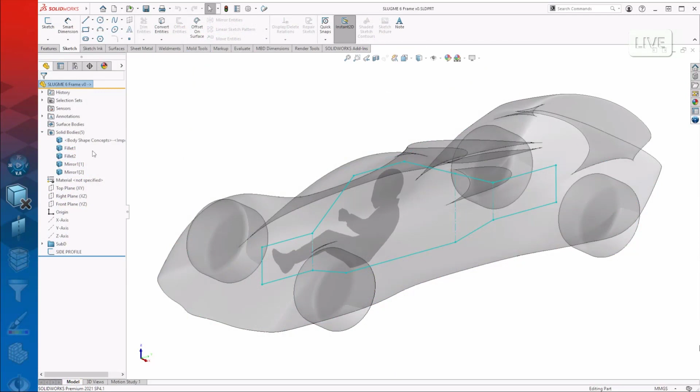All right, so the first thing that I want to do is just clean up this model. I'm going to get rid of the wheels really quick. This is a multi-body design. If you know me, you know my favorite thing is multi-body design. I'm going to start off with some really kind of lame tips first. How would I delete those wheels, Andy? Maybe select all 4 of these and hit delete? No, that's way too much work. You select on this and you delete it, and then you keep that and it deletes everything else, right? Good tip. Yeah, not bad.

Okay, so over on the left-hand side of the screen, you'll see that I've got kind of a timeline going here, because, like I said, I haven't clicked through this a lot, so it's my little visual of what I'm supposed to talk about and show next.

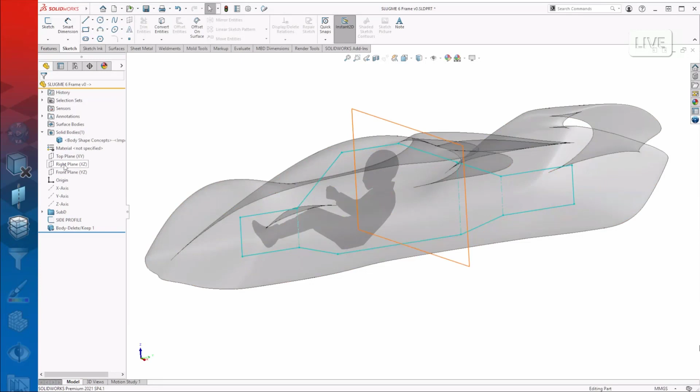Here's probably my lamest tip tonight. We're starting off slow and then it's going to get really good. I'm going to control-drag a plane to create a copy of it. I hope everyone has known that one—if you've ever attended any top tricks user group meeting before, you've seen it.

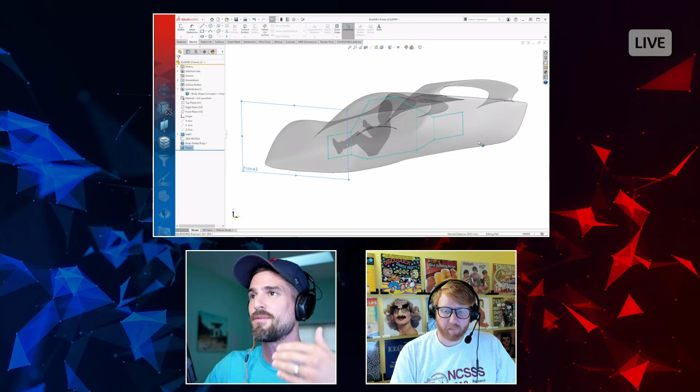The reason I'm creating this plane is because we're going to be creating a 3D sketch. Let's imagine we had a completed 3D sketch of the frame. How would we know if there was any interference between the 3D sketch and Jason's model, which is transparent right now? We really wouldn't, because the visibility of a sketch entity is the same whether it's covered by a transparent model or not. So it's not the most ideal situation.

A great workaround is a new tool they added a couple of years ago—the slice tool. Actually, it's called slicing, not slice. That's impressive that it found it in the command search. Quite surprised that it did.

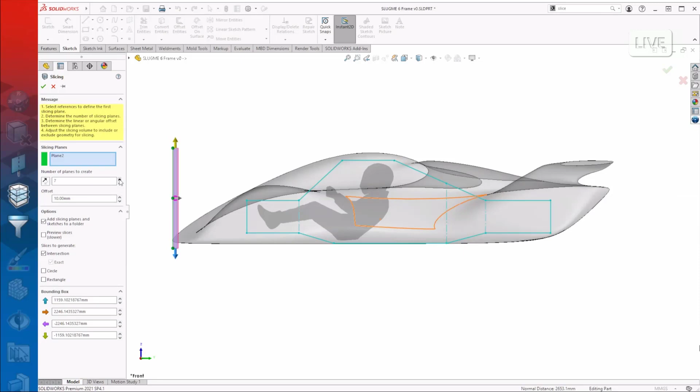If we take a look at this side profile, I've got 1, 2, 3—I'm looking at the connection points, the nodes where these members are matching up. 4, 5, 6, 7. So we're going to bump this up to 8, because the very first one is counted as well. Then we'll crank this up until it's aligned with the very last one. They're not perfectly aligned with where I need them to be, but this tool is pretty magical.

As soon as I hit OK, it's going to think for a second, but in a short amount of time—check this out—it added an intersection curve at every point where each of those planes crossed the geometry that was there. Any geometry that would be there, if I left the wheels there, it would be cutting a cross section through there too and updating that.

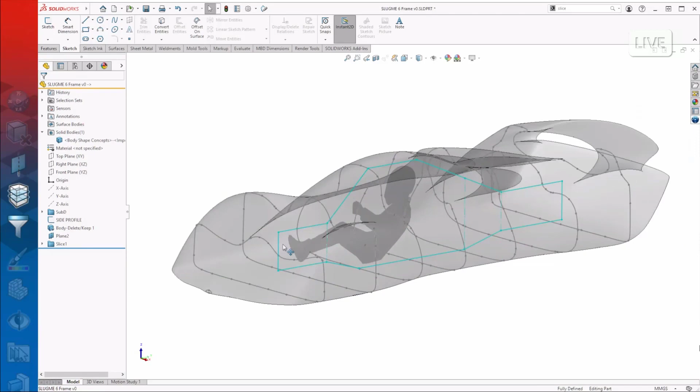One of the amazing things about this is, first off, let's make this a little easier to see. If I expand the new slice folder—which is also a nice part about the tool, it organizes it all for you—I can control-select this sketch and control-select that sketch and that one and go on and on. That's kind of slow, right?

We're trying to show you some shortcuts here. The best thing to do is in your filter bar at the top of your tree, just type in SKE. There's all your sketches. Now I can select this one and shift-select that one.

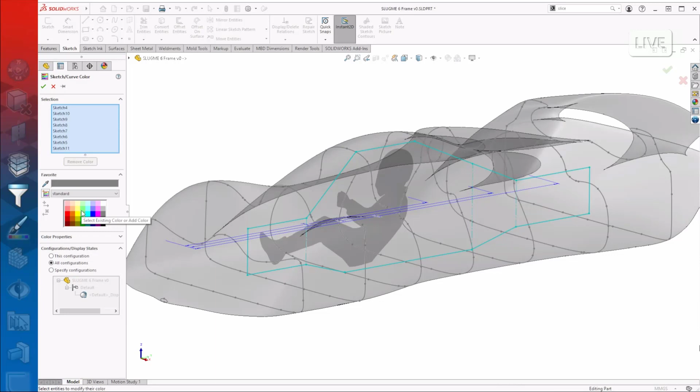Something I always do, especially when creating weldments and stuff, because you have sketch geometry going all over the place, is assign color to this. You want to differentiate your sketches, because if they're all this gray color, you're not going to know what is what, and it'll get confusing. So let's pick a pale cyan, since I picked a darker one for the side profile.

Now we can see very clearly what's happening here. Clearly the front of Jason's design is kind of like a little bat wing, and then it morphs into a frog, and then the frog gets tired and closes its eyes and then gets kind of evil and grows some horns. I don't know, it's the Batman. Yeah, I like that—that's better.

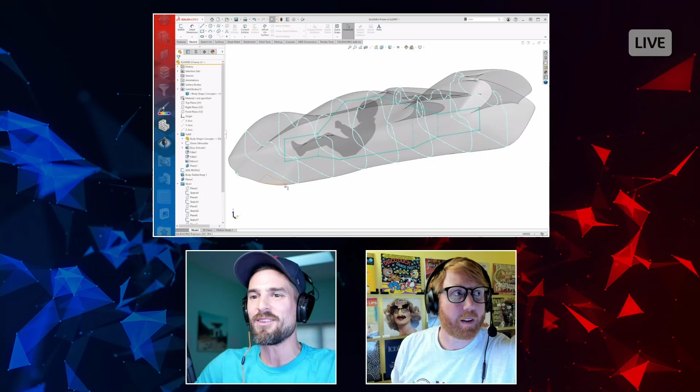So colors are useful, and this tool is pretty amazing. If we take a look at the planes—let's show the planes. Why aren't my planes being shown right now? Well, I got to turn them on. These planes aren't even shown anyway, so that's okay. Let's come over to this—let's skip the first one, let's go to this one.

Instant 3D is always active whenever you see those little blue dots—those mean you can drag them and move them around. And here's what's amazing: as I drag this, it's kind of jagged because it's rebuilding, thinking as it's going. But look at that.

Yeah, it's updating. It's staying associative with the geometry. And that's just, in my mind, pretty amazing.

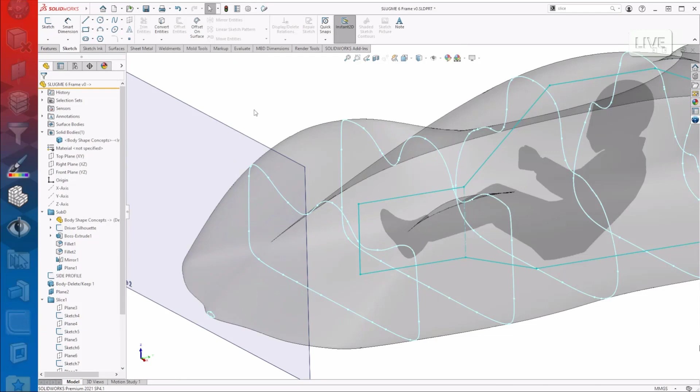Here's why it's especially amazing: if I go ahead and show the tangent edges - by the way, you got to have a keyboard shortcut for tangent edges, right? Especially if, like Andy and I, you're into surface modeling and stuff like that. Sometimes it's beneficial to know where they are, so you could select the edges really quickly. But I mean, what a mess this looks like.

But the cool thing about that is it was traversing across, going from face to face. And it was still maintaining its entities - these got created when we passed this little point right here. Before that, it was just one smooth entity and it separated. So amazing stuff going on with this.

This is the intersection - what is it? Intersection curve. Yeah, so it's just doing that over and over again.

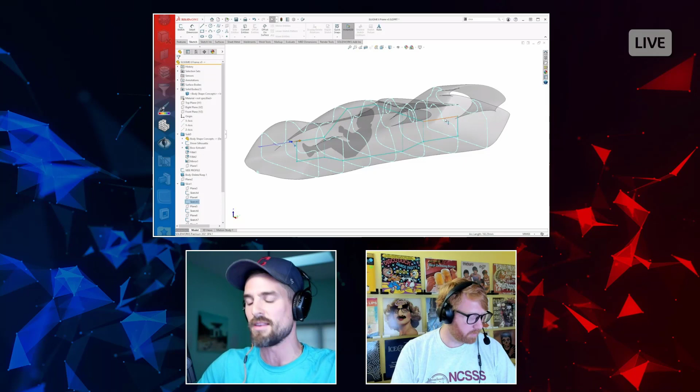By the way, if you're looking for a recommendation for keyboard shortcuts, what I do for most of my favorite keyboard shortcuts is just do Alt key plus whatever letter the tool begins with, because that's readily available. My thumb just naturally kind of sits on the Alt key, so it's really easy. Alt T for tangent edges and Alt G to make them gone - they're right next to each other, so it works out well.

All right, what if I wanted to hide all the tangent edges? No, before we do that, let's follow my list right here.

What is this icon right here, Andy? The little mesh looking thing - have you ever seen that? No. See it on the left, on my timeline? Features? Yeah, I was looking at that before. Like what? Yeah, I honestly don't know what that is. I'm not screwing with you right now. I was like, what's happening?

So I just want to show another use case for that slicing tool. What I've done is I've saved Jason's body out as an STL file. And if you know anything about STL files, they are a mess of triangulated faces. It's just crazy.

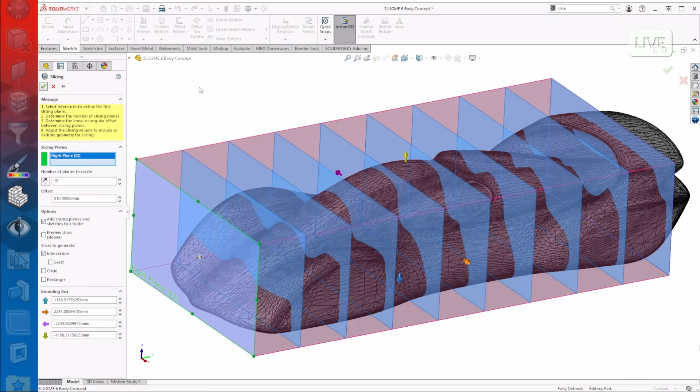What this does is it's going to take a little longer to think about it because it's doing more than it did even last time - it's doing a fit spline on every single one of those intersections. If I change the color of this really quick, we could see it with some evidence. I'll just make this a bright green. And look at that, Andy - it's perfectly smooth. Now we could just go ahead and create some loft features to blend these cross sections together.

So if you're downloading stuff off of like Thingiverse or something like that - I'm getting a little feedback, are you hearing that, Andy? I am hearing that, yeah. Okay, all right, I just want to make sure it wasn't my setup.

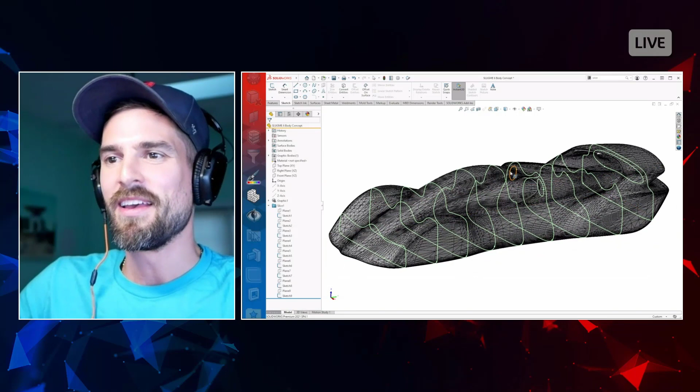But you'd be able to kind of take something from Thingiverse, which is all 3D printed files, STLs type stuff, and actually turn it into real geometry, which I think is amazing. Yeah, definitely. Okay, so let's get back here.

Again, I'm just going sporadically all over the place. I kind of feel like Jason. Like what? Wait, so what was that weird icon?

That was our mesh body icon. So when you insert a mesh body, it is a unique body - it's not a solid body, it's a mesh body. All about mesh bodies, man. All right, man, I've never seen... I'm telling the audience, dude - before.

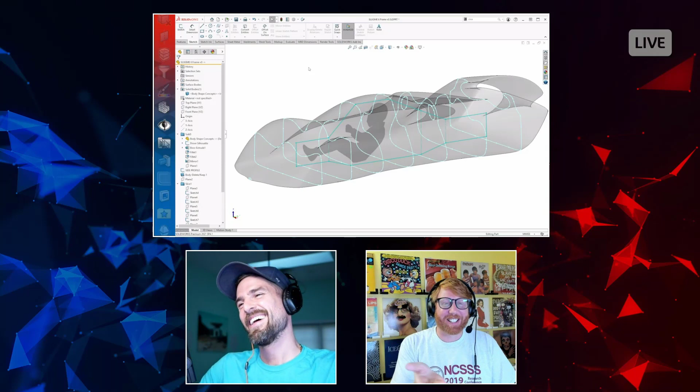Where is that feature icon? Show it to me. Did you make that? I searched through our icon library and that was there. It's a real feature. Are you talking about convert to mesh body? That's a different looking feature icon. Maybe it's a simulation one then. I picked the wrong icon. And maybe you're calling me out for it.

We're going to be over time because we're talking about an icon on my PowerPoint. I just don't want people looking for this voxel brick meshing icon when they're trying to play with their thing from Thingiverse. All right, settle down. The rest of the icons will be accurate, I promise. I got a little stressed with that one, I just picked the first one I saw. How are you not going to let that go though? That's the one thing I used a little liberty with, just be like, whatever. I love it, so good.

All right, so can't get anything by Andy. The next thing is going to be, how would I hide this? How would you hide all those sketches? Just the slice sketches, and keep the side profile.

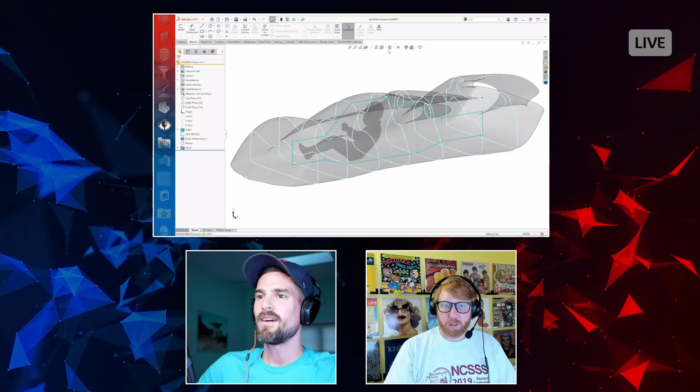Poke the eyeball. Oh, all right, just poke it. But then everything goes. Yeah, uh-oh. So what magic man, what do you got up your sleeve?

The first thing we could do is this trick again, SKE. But once we select this and shift select it, I never want to shift select or filter ever again. So what I'm going to do is right click in space and hit save selection. I do this all the time, especially for multi-bodies, because in multi-body design, especially when you get into weldments, there are cut list folders. Every solid body is separated into a little folder, and you can't just shift select them all. You've got to expand all the folders, control click, shift click, all kinds of stuff to get all the bodies you want.

And then the next time you need to select them, you have to do it all over again. So what you do here is select what you need, it could be sketches, edges, or vertices. You can use selection sets in all kinds of different ways. I'm just going to save this to a new selection. Now up here in my selection sets folder, I just click it, and I've got all those sketches selected in one click. I can rename this to whatever I want, so I'll call it slices. Now it's right at the top of my feature tree, very accessible.

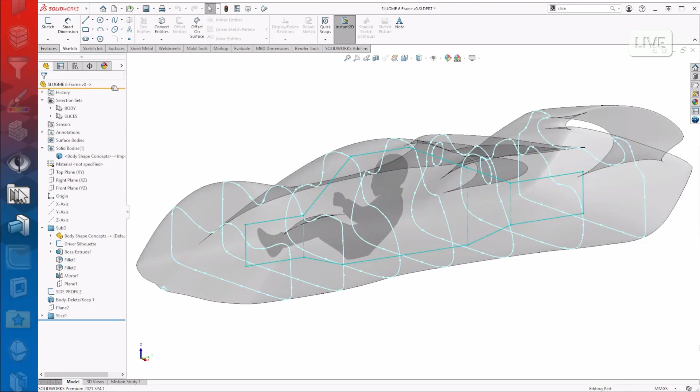I'm going to give you a pro tip here. If I want to hide everything, you'd think you'd right click on this and the hide button would be there, but that's not the case. I wish it was, maybe an enhancement next year. You've got to click on it once with a regular left click, then right click in clear space in the graphics area. Now the right click menu comes up that would if you actually right clicked on all those sketches, and you can go ahead and hide it.

So it's treating it like the feature. Right now, right click, show. Left click to select, right click to hide. And there's another benefit too. What if I just want to see those things momentarily? Just select it, we see the highlighted preview, then click off in space and it's gone. How cool is that? Very cool.

Selection sets are so handy. I can't tell you how many times I've had to individually select like 50 faces, and I make the one wrong click, like clicking in space instead of the thing I want, and then they're all gone.

You know though, that you can right click and do previous selection on the right click menu, which is very useful. Yeah, I found that out, but only if it's the very, very last selection. A lot of times what I've found, we need to make an adjustment for this scenario, like we need two selections back, because my accidental selection was selecting something else, a new piece of geometry, and it wasn't like clicking off in space.

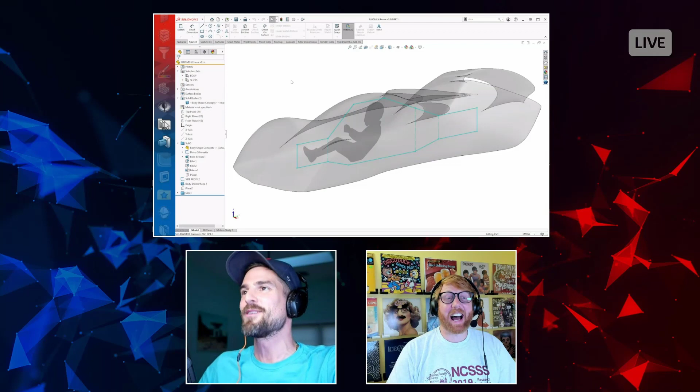And then it's like the previous selection is that thing now. Right. So yeah. Good point.

Anywho, let's move on. Let's actually make geometry now. How about that? Heck yeah. Yeah, I thought we were building a frame. What's going on? I know, right? This is me. I get off on a lot of tangents, man.

All right, so we're going to use this sketch right here, the side profile. Yeah, I didn't want to bore you creating that. We're just going to extrude it, so nothing special here. I hope everyone's using the right-click menu for selecting weird end conditions like the mid-plane, so you don't have to actually find the drop-down menu and do it all there.

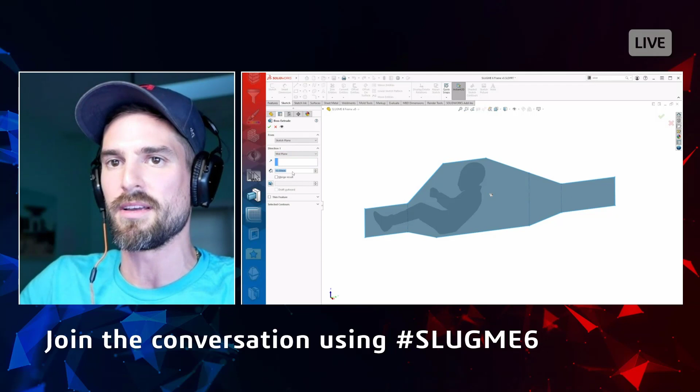And I don't know how wide this needs to be. Let's just make it about there because we're going to cut it away. We're not actually going to make it that wide, right? I think I can hide this sketch now. And I need to now address the top profile. So nothing fun here. Andy, if you want to tell us a story or spin the wheel of conversation topics, I'm just going to draw a pretty regular Joe Schmo sketch right here.

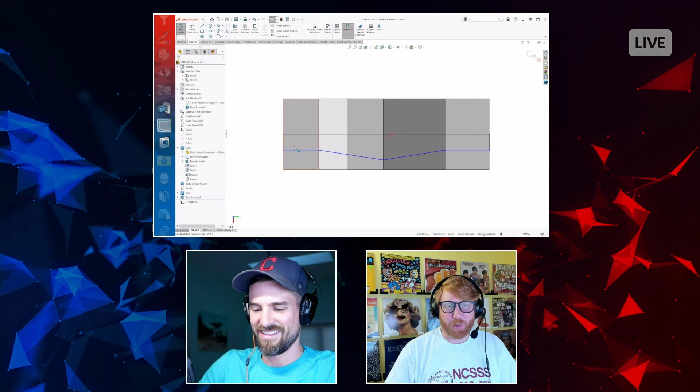I like it. Previously, on our last session, you were talking about how that kids ride shotgun thing is like a death trap. And then my kid asked me if we could go ride on it, and we went in the woods behind my house, which we've never done before because the trails back there are kind of sketch. And I just had that in my head the whole time. I'm like, we're going to go over the handlebars and I'm going to tell Jordan I can't come on the session because we're in the hospital because I'm a bad dad. But we had a blast and I got super sweaty and I had to take my second shower of the day. So there's my story. That's a great story.

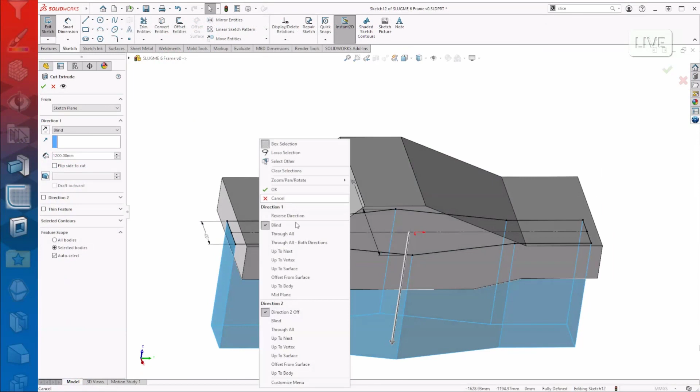And you timed it perfectly because I just added my last dimension. And Too Tall Toby would be very happy. I got rid of all the blue and made this sketch fully defined. Fully defined every time. All right, so we're going to extrude cut this thing. I hope this is not a trick or tip to anyone. Through both directions, and obviously you can flip the side to cut, right? Like I drew a closed contour. Let's cut everything outside of it, and there is my frame. The hard part's done, right?

So what defined this geometry? It was the 2 sketches. And what if I wanted to change the top profile? I would have to come searching through here and I'd be like, oh, sketch 12. Name your critical sketches, right? Definitely, so let's just call this top profile. Love it. And what about the side profile? If I want to change that, it's nested inside of this feature. It's kind of hard. Like, oh, I got to remember it's boss extrude 2 and da, da, da.

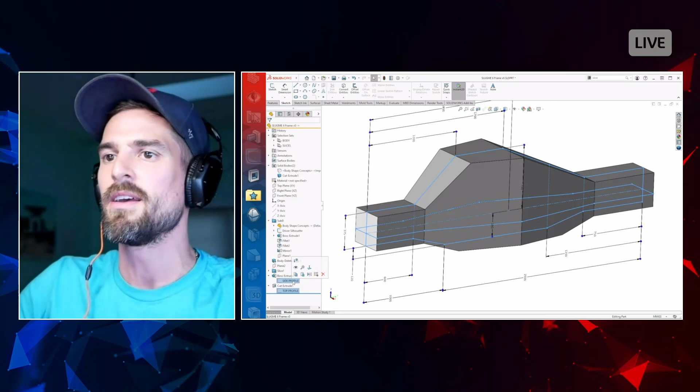Hey, what helps with that is obviously breadcrumbs. Right? Because you could go click on that feature and then, oh, it was made with the top profile. So that's cool. But imagine we didn't have breadcrumbs. And it's still a few more clicks than what I'm about to show you. You can select these 2 sketches and add them to your favorites.

Nice. So Andy, you and I know the master modeling technique. We use that all the time, right? Where everything's based on one master sketch. We always put that right at the top of our tree. Look, there's nothing above it. It's right there. It's super easy to find. And if I want to change its entire design, I go to one of these 2 sketches and modify them. Absolutely. Very basic. All right.

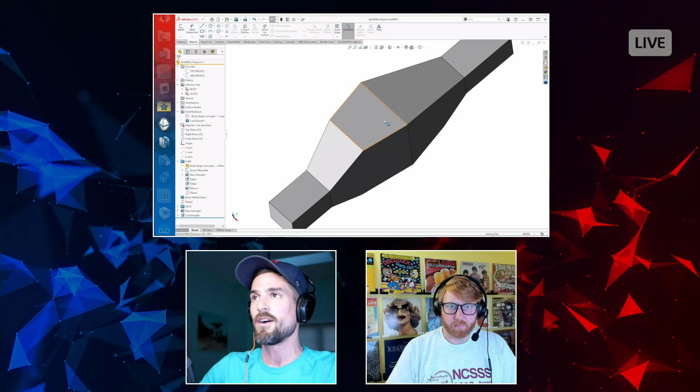So, yeah, I need to add a draft to this because remember, my job is to protect the driver and to make his or her ride as uncomfortable as possible. So he has way too much headspace right now. Yeah, get rid of that. I got to draft it in and cramp it in, so he can't even turn his head either way. It's just hitting the crossbars or the roll cage.

So what I'm going to do is start a sketch on the side plane. And what we want to do here is just split it. So I'm gonna fire up the line command. And how would you split this, Andy? I'd use the split tool. Trick question. It was that easy. It's a split command.

Were you thinking like, because some people don't necessarily know that you can do it with a 2D sketch? And you can create a plane or something? Or you might need to create a plane. You might need to create a surface that extends past the boundaries of the model. No, because a sketch resides on a 2D plane. That 2D plane defines a direction that the sketch would be projected. So that's enough information for us.

The next question asked in this property manager is, what bodies do we want to split? It's that one, the only one on the screen. And then we just need to use that tool to cut the bodies. Now it shows us that the resulting bodies is this. And this tool can be intimidating to some people because as soon as you fire it up, you're presented with part templates and assembly templates. It's going to propagate elsewhere. It's going to create more files. Yeah, you're like, what is going on?

Right. So what I do typically is I just cancel out of those template prompts, because if I'm just trying to split a body and keep it in this part file, that's all I need. The reason I didn't see it is because I have default templates set up. So if you do that, you can avoid it.

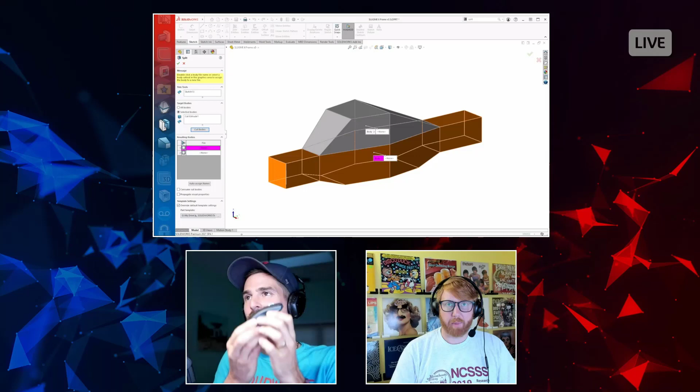But those templates are super powerful, because in the master modeling approach, when you're modeling something like this mouse, no one is going to model this top part and then this side part and then the bottom part all separately and then assemble them together. They're going to make this out of a single solid chunk of material, split it apart using a split tool, and then save each one of those split bodies into separate part files. Yeah. Then they could shell it out, add ribs, do whatever they need. We're not taking it that far. We're just splitting it. So that's why I said you could just ignore the part templates, ignore the assembly template.

And here's a little tip right here. Anything you check is going to be kept. So you could omit a bunch of bodies as well that you don't want to keep. But a quick way to select everything, sometimes you have like 50 resulting bodies, just click the scissors and it'll select everything in the column.

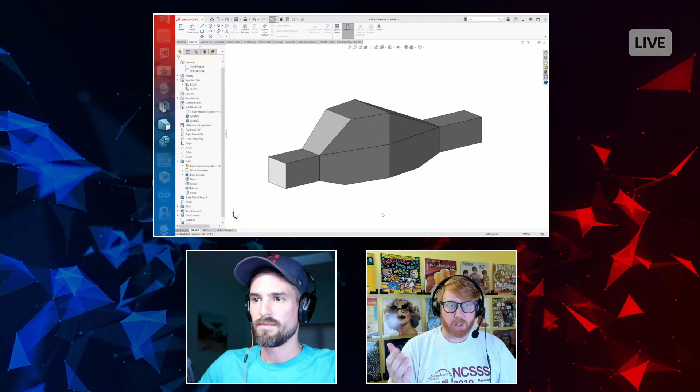Nice. What I was thinking about while you were talking about, oh, it's a line on a 2D sketch, so obviously it can be extruded out, extruding a surface. I was thinking about Marcus's session as well. Like sheet metal, weldments, well, I don't need to know surfacing stuff, right? I'm not creating organic geometry. But if you understand surface modeling, all of the other stuff makes much more sense, right? Weldments, sheet metal. If you want to figure out why your sheet metal part isn't flattening, if you know about surfacing, you're gonna be able to figure it out much easier. So take a surfacing class. It'll help you with everything SolidWorks related. Yeah. Everything is based on surfaces for sure.

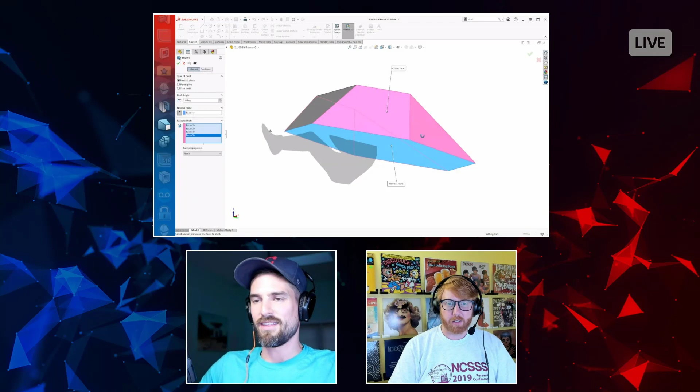100%. I totally agree. You're drafting here, and the blue face is the neutral plane. That's it. What are the pink faces? The faces that you're going to draft. Yeah. So you're going to go 5 degrees. Now, this is my problem. Are you going 5 degrees in or 5 degrees out? I never know. You want to know how I taught myself to know? You go a big value and then you look. That's what I do. I do a really big one, and then I go, oh, it's going out. And then I make it small again.

The guy that could make sense of 600 nodes in a graph layout has never figured out the logic behind it. All right. Well, it's probably not the most straightforward logic, but this is what my brain came up with.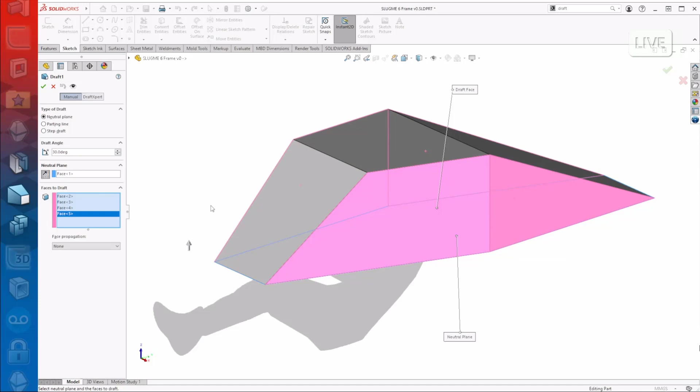So this arrow is representative of the direction that the tooling is going to be releasing from the part. So if the tooling is being released this way, we know that it will draft inward so it could fall out of that die. Right. Remember, you're pulling the pan off of the muffin. You're not pulling the muffin out of the pan, right? There you go, man. You got it.

So that's what I told, watch me be wrong. No, it was right. It was right. That would have been perfect. That would have been great. And I'm wrong.

Let's bump this back over to 25. Let's not suffocate him. Let's just make him really uncomfortable. Okay, so there we go.

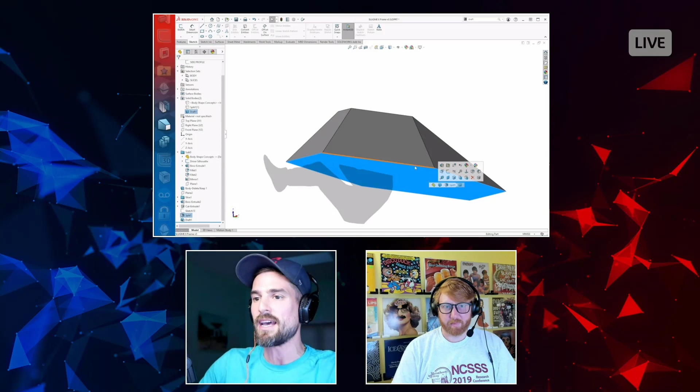That's what it did. Wherever this face intersected this plane, the neutral plane, and what it means by neutral is that all these edges stay stationary. Right. They do not move. They stay neutral. Everything else moves about them. So this face rotated in 25 degrees, this face rotated in, and they're all pivoting on the edges that intersect that neutral plane. That's how draft works.

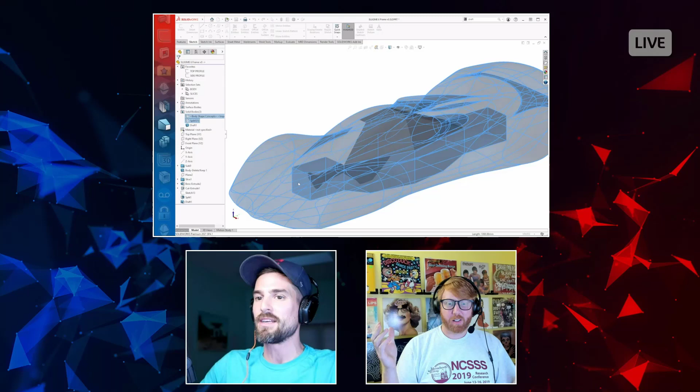And why am I doing this to a solid body? We'll get to that soon. But for now, let's just bring back the bottom half of it. And by the way, did you notice, everyone knows Tab to hide a body, Shift Tab to show it. Here's a cool one too. Control Shift Tab shows all the hidden bodies temporarily. And then you click on the ones that you want to keep.

No. Yeah, man. Control Shift Tab. You just blew my mind, dude. Isn't that awesome? All right, nice. I've literally never sat through one user group session ever given by anyone where I didn't learn something. There's always something where I'm like, I had absolutely no idea that icon looked like that. It only took 31 minutes, but I'm proud of myself.

All right. So we drafted. Now we combine. I'm sorry, I've got no tricks with the combine feature. You click the two bodies and add them together. All right, this is very exciting. Good.

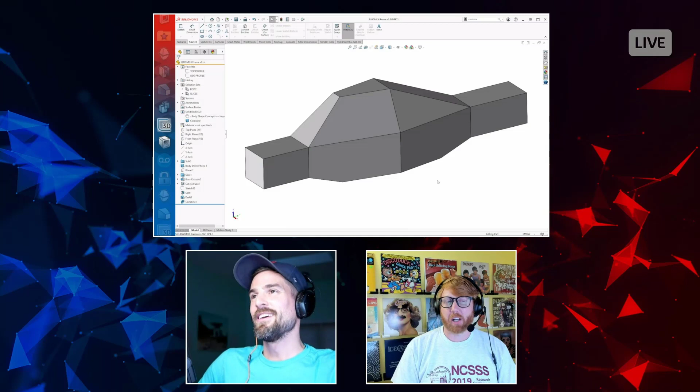The 3D sketch command. Are you ever excited to draw a 3D sketch, Andy? I wouldn't say excited, but I am not worried if I know that I can go from one point to another point. You know what I mean? With 3D sketch splines, I am not touching those unless I'm going from a vertex to a vertex. It's the worst. And then hopefully I have edges that I can make tangent to, right? Oh, yeah, and style splines aren't even enabled in 3D sketches, are they? I don't think so. They are, I just don't think they work very well. Okay. Well, I could be wrong. Either way, we gave it a huge endorsement.

But seriously, the only time I use 3D splines is when I'm going from one point to another point. So that's a 2-point spline, so I'm probably not going to use a style spline. Okay. So how hard was it for me to create this geometry? A couple of extrude cuts, separate the bodies and draft it. I arguably could have drafted without separating the bodies. We'll get to that in a little bit. I didn't want to bring it up, but okay. Anyways. Right. Yeah, I know that, dude. All right.

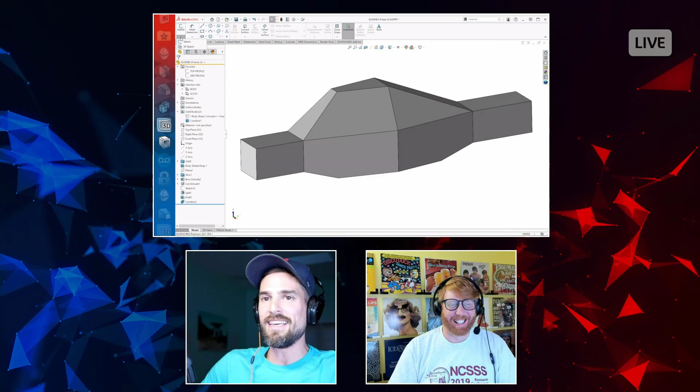It wasn't hard to make this geometry whatsoever. Super easy to update, right? Because all the driving sketches are a top profile and a side profile, and I can change it all. 3D sketch, the easiest. Whoops, that's a 2D sketch. Yeah, I was going to say. The easiest 3D sketch in the world is my favorite tip right here. Click an edge, hit Control A. Because you pre-selected an edge, it'll select all the edges. Nice. And then convert entities. Nice. Done.

If we edit the top profile or we edit the side profile, that's going to update the feature that was below it, and that's going to update the 3D sketch and we're done. And we're going to do that in our design change. But just trust me for now. Isn't that awesome? Nice. Very cool. Yes. That's my favorite tip.

I didn't know the Control A thing. I think I've always gone into convert entities and then just done a big window select. Oh yeah, you can do that. But then I'm always like, did it select the edges on the backside? It did. I know that it will, but I still rotate around and check it. So if it's really complex, I'm always like, did it really happen? Yeah, for sure. I've been there for sure.

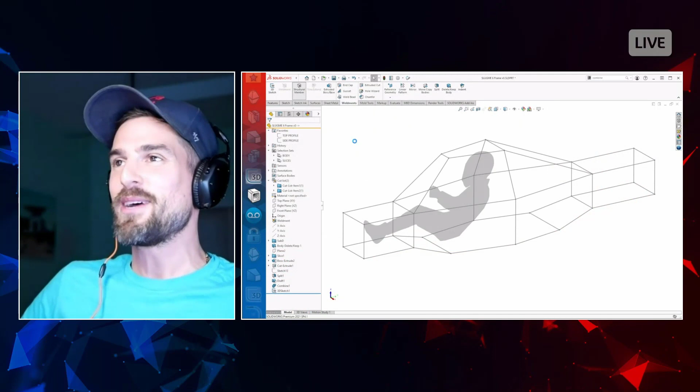Definitely. Okay, so what we're going to do now is finally create a structural member. I know. I thought this thing was on weldments. What's happening here? I know, man. I'm sorry. But as with many things in life, the hard work is done up front. The easy part is now. Adding the structural members is not the difficult part. It's all that underlying geometry.

Right. So the thing to know here is that there's a couple of rules. And while you're doing this, there's this thing called groups. And this was added, man, how many years ago? It was a while ago. Yeah. But when they came out, it was the biggest deal ever, especially for me, because I do all kinds of home construction projects, and I use weldments all the time for that.

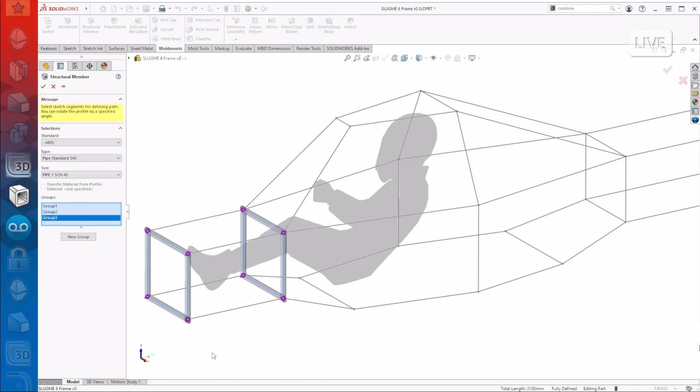And the rule here is every point needs to be connected end to end, or they need to be parallel. Okay. So when I'm selecting, let me start a new group here. It didn't let me select that, by the way, because I was still in that group, right? And a little bit of knowledge about space frame design: these are called hoops. And you create the hoops first because they all need to be very robust connections to each other. In fact, the main hoop, this one right here that goes over the driver's head, is supposed to have fillets there. I just didn't add them because I was lazy, because that's supposed to be one continuous tube.

And wow, they just bend the tube. Andy, what happened? What did you do? It should be able to select this, right? End to end, right? What the heck is going on here? Hold on. I don't know if this is planned or not. Let's see what's going on at this corner. Oh, what? I got an idea. You do? Yeah. It's because of the draft.

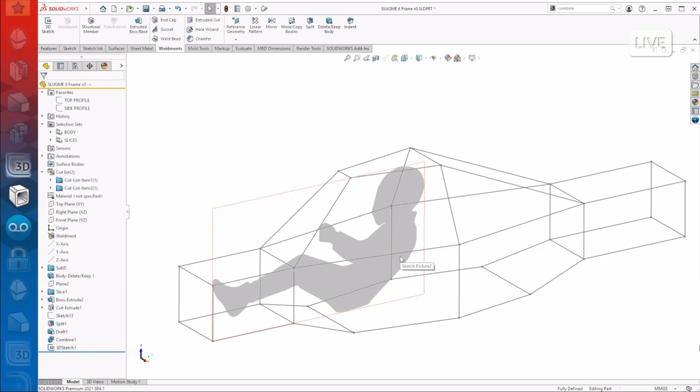Yes. That's not an idea, though. That's a diagnosis. You wanted a solution? Yeah. Like an idea is providing some useful information, I thought.

Okay. Thanks, dude. Oh, by the way, let me edit this sketch, because we do want at least a cross member right here. Yeah, I was gonna say, the hoop should at least go around the bottom.

I like how you're like, everybody's safety is in my hands, and then you're like, I didn't fillet this super important thing because I'm lazy. Yeah, but you know what?

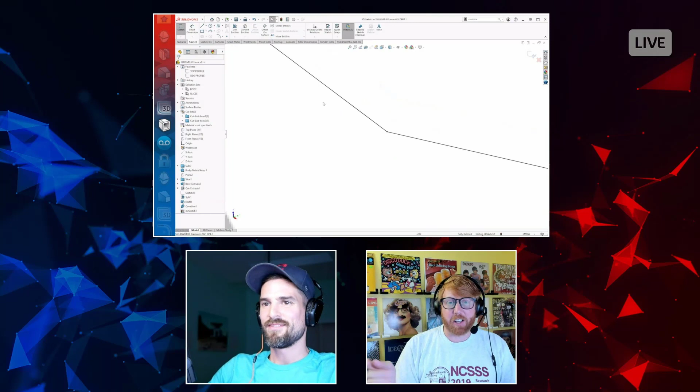So this did happen because of draft, right? Because it's compound angles, and they don't have the same seam at the top where they intersect, and then that crosses over. I've got an idea for a solution. I'm gonna be pumped if it's your solution too. Delete all of those lines and just draw new ones. Perfect. Because now you got the 2 points, right? And that's when it's okay to do a 3D sketch, is when you got 2 points.

It's really easy. Guys, everyone in the audience is going to think we rehearsed that. We did not. We didn't have time to rehearse. We didn't even rehearse my session. We really should have. I don't think Andy ever successfully completed that model. Anyways, that would have been the first time. What? No, I'm kidding. I did successfully complete it. I just didn't do it all uninterrupted. I was always getting interrupted. So I think it's between 20 and 45 minutes.

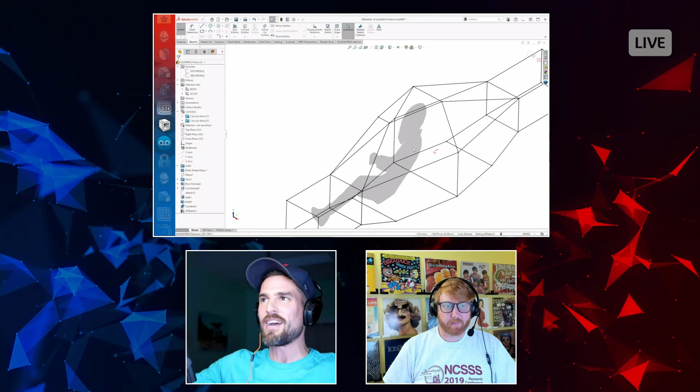Yeah. But Andy, you're exactly right. That took no dimensions. That took no relations. I was just connecting black fully defined dot to black fully defined dot. These are going to update just fine. And we're going to ignore that little jagged edge in between, because we just bypassed it. So that's perfect. Devil's advocate: that's gonna blow up if you change a top profile sketch, right? If you change one of the master sketches, that breaks. It may or may not, man. It totally depends on the draft angle, if that edge is still maintained or not.

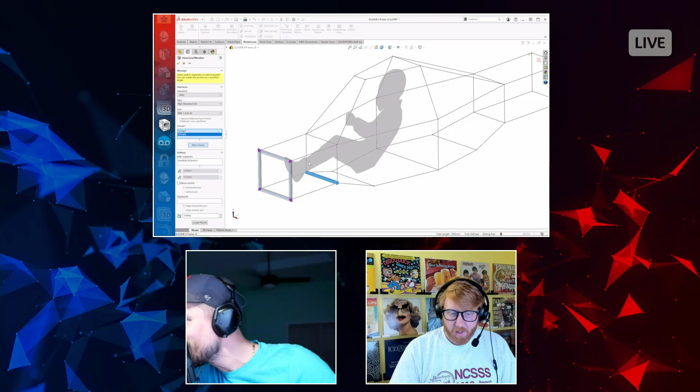Okay. Oh, you don't sound too confident in my confidence. Wait, are you gonna update it? Yeah, we're gonna update it. Of course we are. All right. I'm excited now. Yeah, no, I'm already worried about time. Where are we at? 33 or 38? I can't see. 38. Ah, dang it.

Okay. Could you window select those hoops? Hey, that would save some time, wouldn't it? Yeah, I can. And I knew that, and I don't know why I was doing it like this. I think it was because I wanted to be very deliberate about, oh, I got to do a new group first. There we go. About the connections to each other. But yes, you're absolutely right. Now that the audience understands what's going on, this is a much faster method.

And one of the things that you want to pay attention to when you're doing weldments, and remember I said earlier, this enhancement, the groups, you're probably wondering why I hype it up so much. It's not that big of a deal. The reason it's a big deal is because the order of trimming happens based on the order you select everything. So the most important members, the hoops, I created them first because they're all connected to each other. Right.

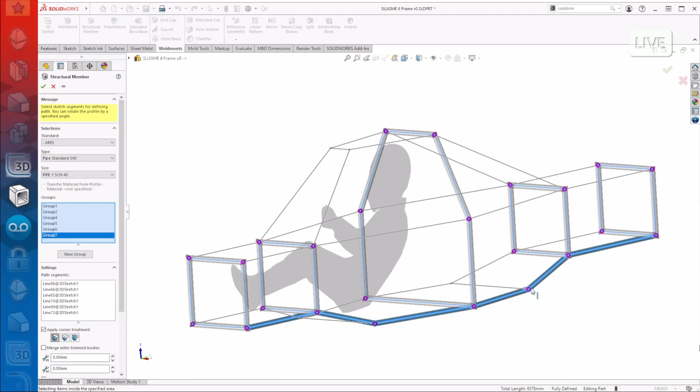And everything else downstream will trim to it. So there you have it. That is the order of operation that this would actually be manufactured in. That's what it's representative of. So yeah, I'm just creating a new group, going on and on. Window selecting these guys, and we'll be done in... Andy, tell another 30-second story.

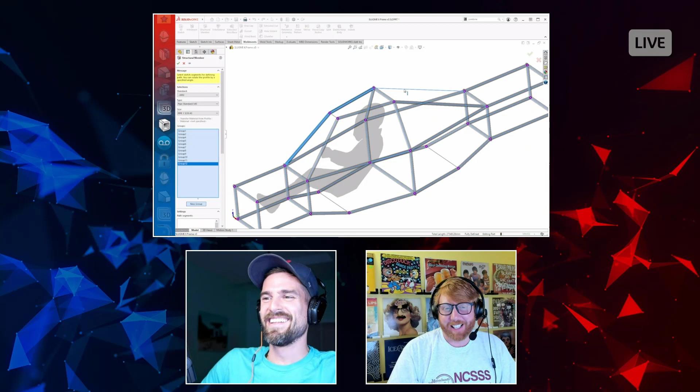Well, I was really excited to go to Atlanta because Jordan told me that Killer Mike from Run the Jewels has a record shop, and I love records. I was telling him that today, and he's like, "Do you mean the barber shop? Because Killer Mike has a barber shop in Atlanta. I don't know what you're talking about with the record store." But I'm sure we can find a record store to add to your collection when we're in Atlanta, for sure. But I will go to Killer Mike's barbershop and get a sick fade because I've never had one. And I think that would be funny to do right before a big presentation. Yes. And risky. You could also do it after your last presentation. No, dude. No net. Okay. No net. Live on the edge, for sure.

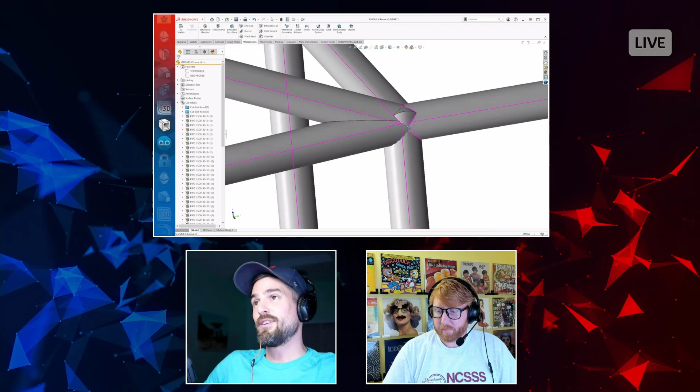By the way, just to continue on with my theme of always coloring all my sketches, that just makes it so much easier to see what's going on. I like it. So if we take a look at what's going on now, would I want to put this together and cut all those copes and stuff like that? I don't know. Not me. That's manufacturing to worry about. But the software is doing what I told it to do, and that is it's trimming the hoop together first, and then everything that came second is trimming to those previous structural members. So it just becomes super intuitive about what is going to happen in what order when you pick it in that way.

Let's see here. I think we're done, right? No, cross members. I'll zigzag a few across there. No big deal. I am now going to send this over to, by the way, I was looking at the next feature icon, and I'm like, that is my phone's voicemail icon. What is happening right now? I'm going to send it over to Shreyas, who's been waiting for this to update. By the way, I could just right-click, save this right back up to the cloud. Nice. But let's see what Shreyas has to say about this particular design.

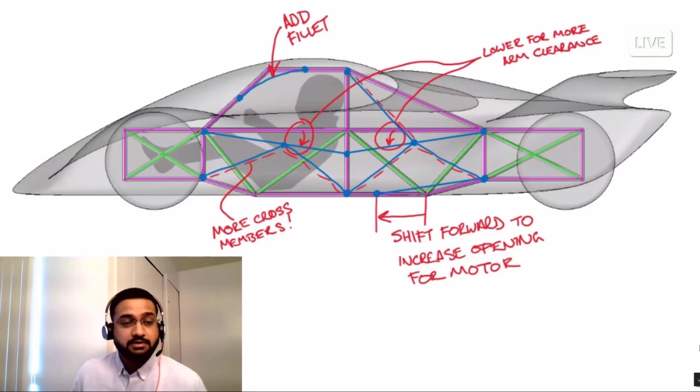Hey, Jordan. How's it going? You can hear this, right, Andy? I wanted to reach out to you, tell you that I ran some simulation on our first design iteration, and the results look pretty great. I think we have a really great first design that we can build on. Though I also have some recommendations based on the simulation results that I feel can be a great improvement in our second iteration. So the first thing I would like to see is if we can add a few cross members, create that load path for the forces to transfer laterally and also longitudinally along the chassis. I definitely saw a few hotspots on particular members or nodes of the chassis in our first iteration. So I think we should definitely try and avoid that.

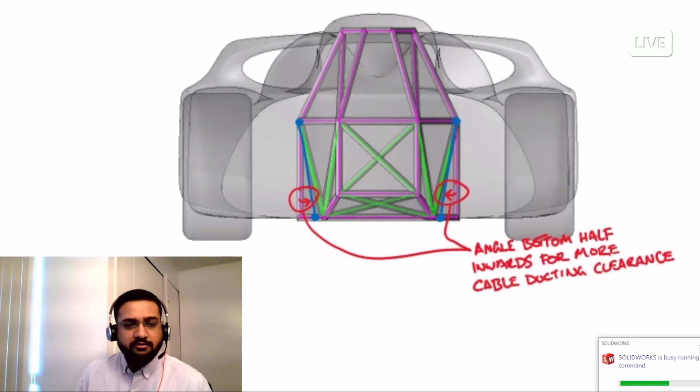The second thing would be if we can taper out the side impact structure of the chassis on the top side and taper it in on the bottom side, also leaving some clearance for all the ducting, wire ducting and things like that. And then if we could add a fillet and avoid that sharp corner on the roll cage structure, I think it will distribute the stresses more evenly there as well. So these are just a few things that I noticed based on the simulation results. Let me know what your thoughts are. I'll definitely run a new simulation if we get these changes, and then see how it goes from there. Thanks, Jordan. I'll talk to you soon. Bye.

All right. So it looks like just a couple changes. Just like you're almost done. You thought you were done, and he's like, just redo the entire thing. Yeah. So cut me some slack, man. Right? Oh geez. We've got some work to do, man. We've definitely got some work to do. So give me a second here. Some technical difficulties. I just restarted SolidWorks because it was acting kind of laggy, full disclosure. So hopefully it's not anymore. Let's bring it back.

There it is, I'm gonna jump ahead to where we left off. So I'm opening the model that I had saved halfway through. Man, I hope you caught all that we had to modify, Andy, because that was a lot. I was kind of preoccupied while Shreyas was saying all that, but I'm going to give him what he wants, man. He's a smart guy, I trust him a lot more than I trust myself. So let's do this.

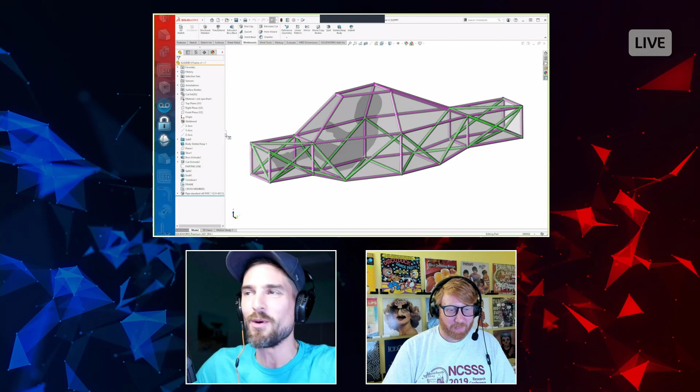Here's a huge tip, something everyone should be aware of. The first thing you do when you go to make changes is roll the rollback bar all the way to the top, right? Then you start at the top and work your way down, because you follow the same order the part was made in the first place. But there are some things we know we're not going to be modifying, including the slices and all that stuff. So I'm going to drag this yellow bar up at the top, down below the slices.

And then you get this little lock icon. You know what that's called, right Andy? Feature freeze. Yes. So if you don't know what the feature freeze bar is, just search FREE inside of the options, and it'll show you right on the first page of the system options. You can enable that, I don't know why you wouldn't want it enabled. What this means is every time I make a change downstream, it's not going to waste time recalculating everything above it. Saves me a lot of rebuild time.

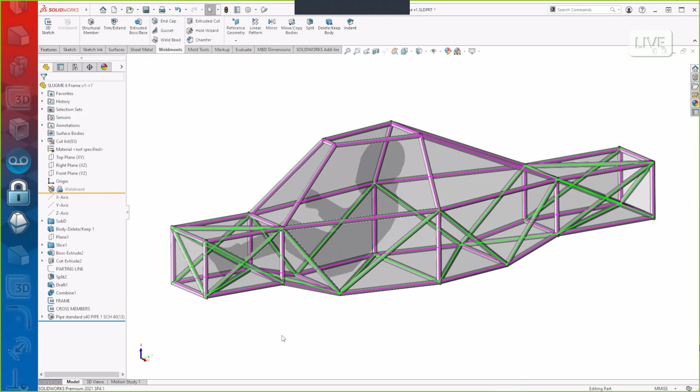You know, I think I was going to do that after this, because the first thing that I need to modify is a side sketch, somewhere above the actual extrusion feature. So let's just do that really quick. Where's the side profile sketch? Right here in my favorites feature. Boom, so I don't even need to edit that.

Let's just go in here without editing the sketch and type in a new value, like 1600, just to make a change. Okay, now watch this, everything is going to update. The cross members are going to update. The model, because of 3D Sketch, updated from the underlying solid body. So that's cool, pretty long rebuild time again because it was calculating a lot of things it didn't need to. Subsequent rebuild time should be a lot faster.

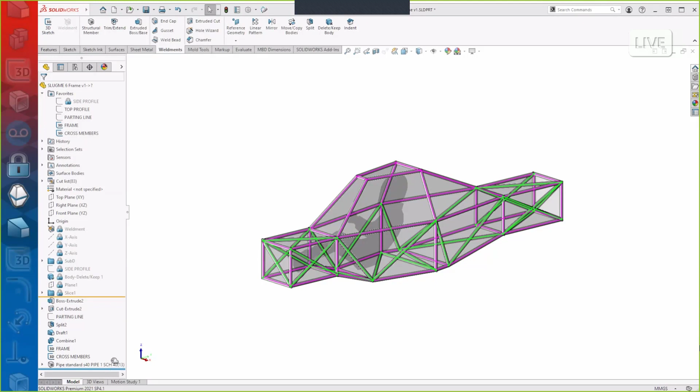Let's move on to the next step. I'm just going to roll up to this top feature. We already looked at that extrude, I don't need to change anything else about it. How about the top cut extrude? Oh, sorry to disappoint, Andy, we are on limited time. I don't need to change anything with that either.

But we do need to change this parting line. So I'm going to go ahead and edit this, because one of the other things he had on his sketch but didn't mention is that we need to make more arm space for the driver. So let's go ahead and make this transparent so we can see what I'm talking about a little bit. Is that it? No.

See, this is why I like selection sets. Right? Because you had to expand the folder to get to what you were looking for. Oh my gosh, we're leaving that guy no room to spare. And your big cushiony seat - Shreyas tells me that no, the seats are made out of sheet metal, they're like 10 millimeters thick of padding maximum. So that would be horrid.

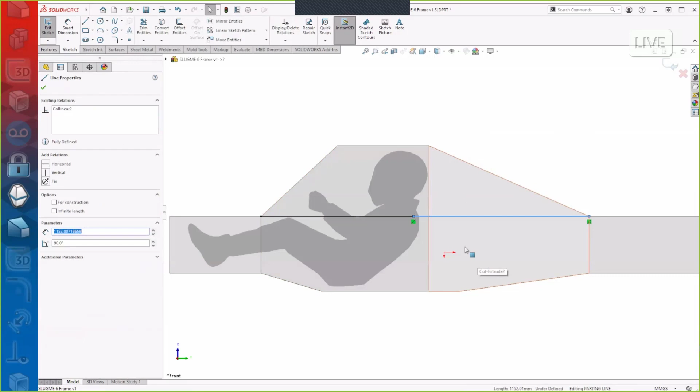Anyways, let's split this into two. And this is kind of dangerous, right Andy? Because everything that was related to this sketch entity is now going to be related to one of these two sketch entities. I don't know, maybe someone in R&D can tell us the logic for how it chooses which one to stay attached to, but I am totally unaware of that.

And the reason we're doing this is because we want to add a little bit of shoulder room for this poor guy. So we're going to bring that down like so, about. Let's throw a dimension on there just to be proper. What's that at? 645. Let's round it down to like 625-ish. Okay, I'll allow it. Okay, thank you.

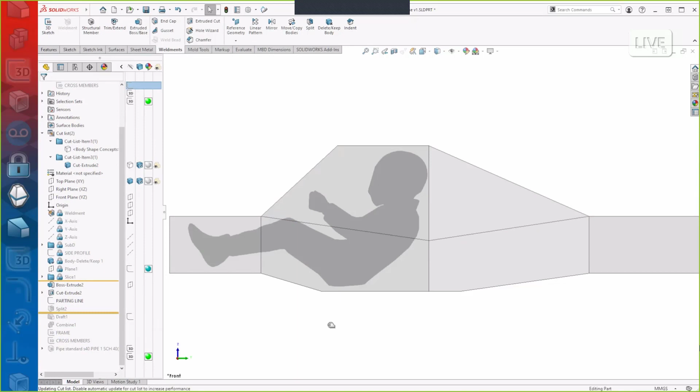And then we've got the parting line, that looks good. Let's go down to the next feature. The split, that updates as we would expect it to. So good, good, good. The draft feature, good. Yep, that looks weird, right? Well, look at what happened - the original split created the face on the bottom of that top body. We picked that face for the neutral plane. That face was split in two, essentially two faces downstream, so it kept one of them as a neutral plane.

This one, because the edges match up and stay neutral. But this one over here separates because if you look at the side, the neutral plane is actually an angle coming all the way down. This theoretical surface, where it intersects that angled plane, is where the pivot point is, which cuts it inside of that edge.

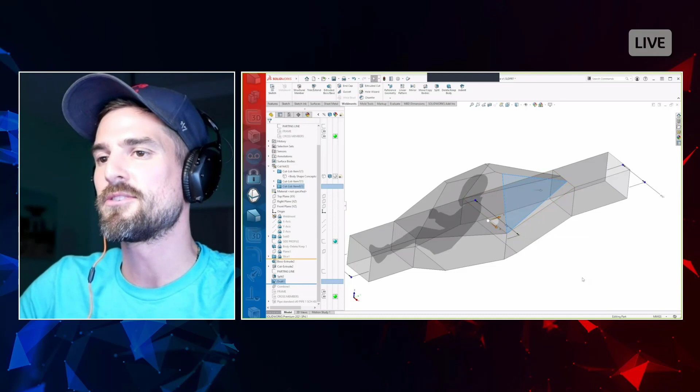Yes, I agree with all of that. I'm going to do what you had already thought about in your head. I know you have. And that is, yeah, I didn't need to split the bodies.

Moving, we get so little time. Oh my gosh, oh my God, you're right. All right, so...

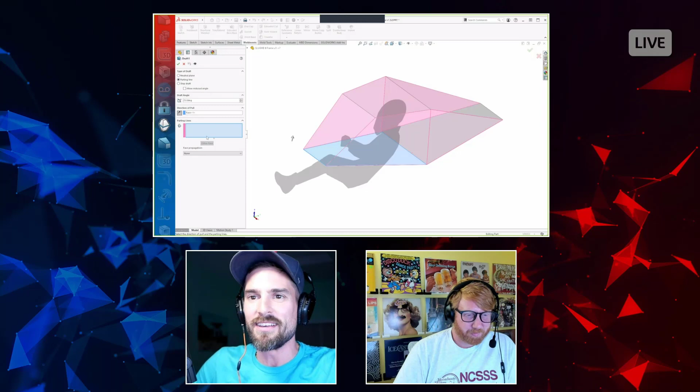Oh God, all right, so what we're going to do here is switch it to parting line. And rather than selecting the angled face, we're going to select the top plane.

Are we seriously going to have to do another bonus session? My God, I'm terrible. I mean, you might. I'm going to bed.

All right, we're going to pick edges instead of a face to define the parting edge. Love it, so now each face is going to have that edge as its pivoting point, so a lot more information for it to react differently. Let's see what this looks like.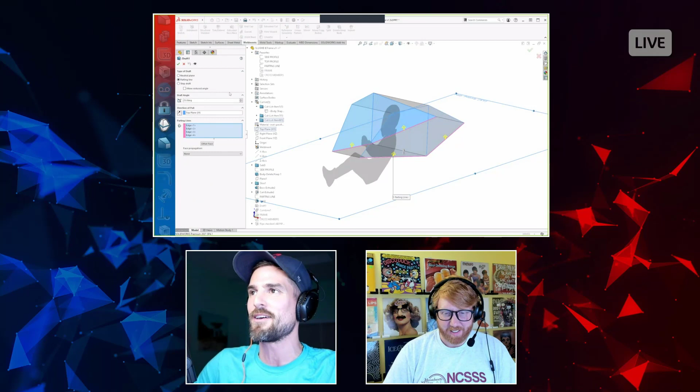Oh, of course, I didn't pay attention. Even when you pick the right direction the first time, it will flip it on you just to remind you that SOLIDWORKS always picks the wrong direction initially. Because it's more funny that way. It does add a little something, keeps you awake. You know? Yes, all right.

Let's bump this down to like 20 or something. Again, I don't want to injure that guy.

All right, let's bring back these solid bodies. We are going to have to hustle. Oh my gosh, you know what?

I say we hijack Toby's wrap up tomorrow. Yeah, and Tony just from the Connecticut user group. Yeah, we should.

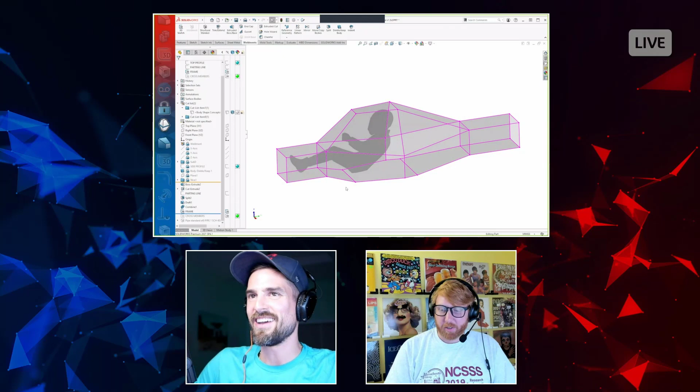Yeah, I'm foreseeing this. You know what, we'll skip that fillet - you wanted me to round that off. I was waiting for that. I wanted to know what was going to happen with that fillet, but I'm okay, I'll survive, it's really not that big of a deal.

I don't want to waste time sketching. You just added a fillet in a 3D sketch, and then you move this line. You use replace entities to move that line so that the weldment stays connected. Yes, that's what I was wondering - is it going to lose that edge? What happens? There's a replace entities command highlighted right now.

It. Yep, okay. The other thing that we needed to do was to draft the bottom side. Shoot, okay, so that's before the combine feature.

6 minutes. I got this, Andy. I got this. We do not need Toby's time tomorrow. Yeah.

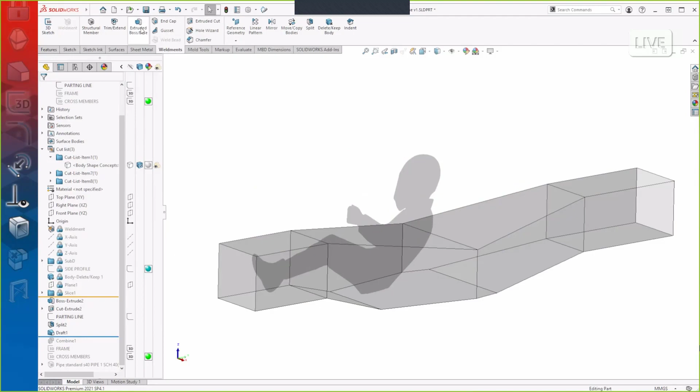I'm laughing because Eric Beatty said for his next modeling presentation, Jordan will be creating a shovel so he can dig himself out of the hole that he's putting himself in with Steve Calvert. So, but awesome, for real, I think I'm actually gonna make a shovel. They're cool shapes. I'm gonna make one in X shape and then do it with X mold. Yeah, let's do it, that would be a great user group meeting. Yeah, and it has a great story behind it.

So look, I'm just doing parting line again, right? Yeah, and we're going to pick the right direction this time. Of course, it's the wrong direction. It's amazing, how does it do that? How does it know? It just knows, man.

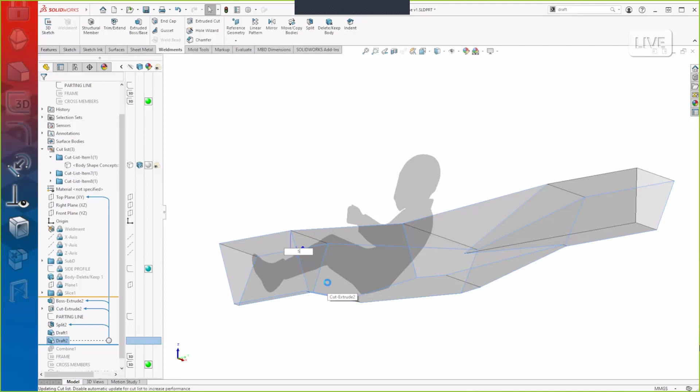And we do not need that tight of an angle. You sure? Like it came in on itself in the back. It'd be so dangerous. I think you might - I think you missed an edge in the back. It's like asymmetric. Yeah, you're right. Thank you. You're welcome. That just wasted another, let's see, 12 seconds.

Good, we're good, it'll be fine, probably. All right, yeah, let's see what happens. We're going to roll down here. Woo.

Combined, not terribly worried about that. No, that's like one of the easiest commands. And what would you say is the easiest command in SolidWorks? Extrude? No way, way too many options.

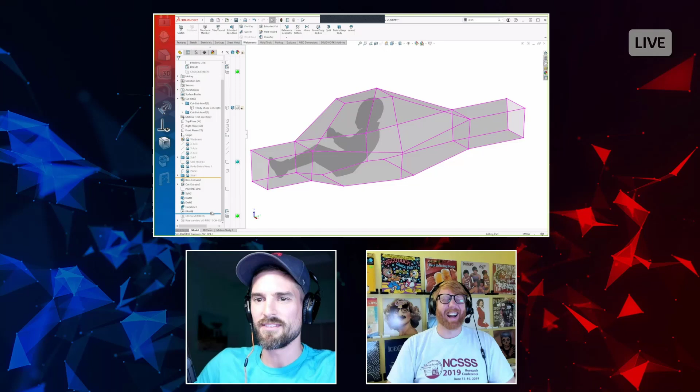Cut with surface: one selection box, one pick side, a direction or the other. Well, you got to do some pre-work up to that. This is whatever, we have 4 minutes left.

All right, so look at this. The sketch is perfect, but I'm going to fast forward ahead because watch: if I come down here and rebuild the weldments, it's going to look like a hot mess. Yes, it's terrible, right. Things are missing everywhere.

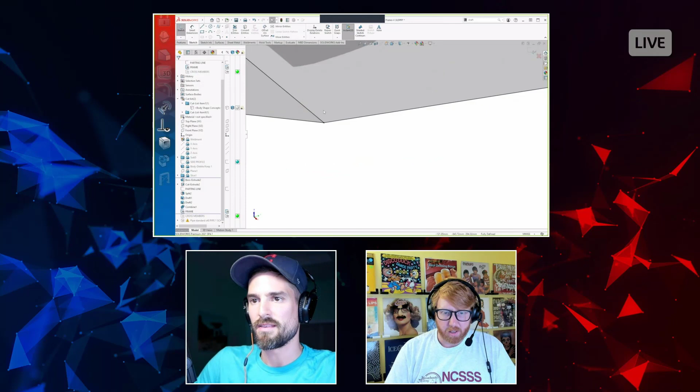But again, what did we learn last time, Andy, the last time I added draft? The lines don't line up necessarily? Yes, boom, those ones look good. Oh, there we go, right there. Oh yeah, so what are we going to do this time?

Higher stakes this time, we already have the structural member that's referencing these members. Ooh, I know. Get rid of the convert entities, get rid of the on-edge relation, and drag the vertex onto the point. Yes, nobody's gonna believe we didn't rehearse this.

I mean dude, we've spent too many modeling sessions together. Exactly, I think, yeah, we're too much alike.

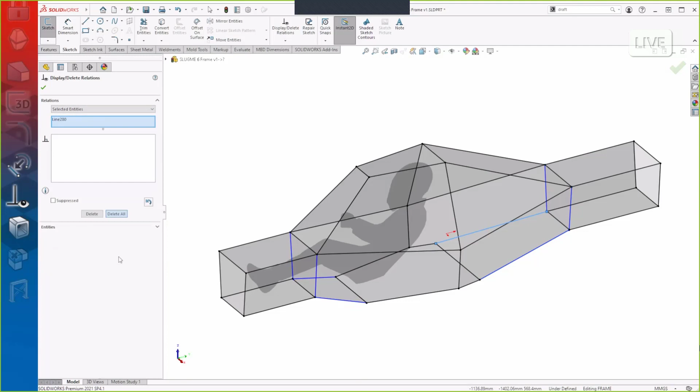Anyways, I did do one thing: pre-selected all those and hit display delete relations. Did you know it will filter to the selected entities? So now you could just pre-select those and hit delete all, and it gets rid of all of them at once. So that's kind of nice.

And then you just need to come over here and drag these into place. All right, so I promise you, if I do that and roll down, it will rebuild perfectly. Okay, I believe you. I believe me too. And I hope some people do.

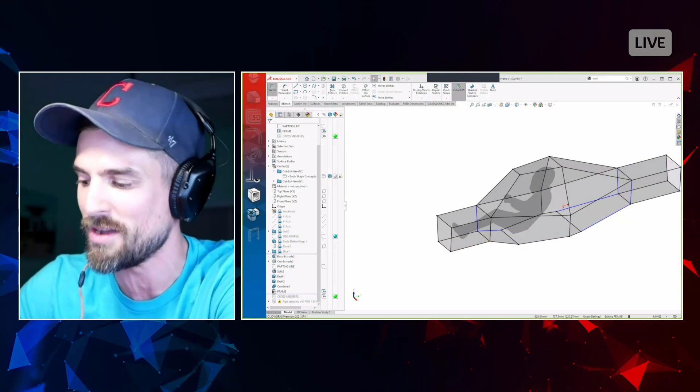But what I'm going to use the last 2 minutes for is a little bonus section from my friend Daniel McGinn, who is a product manager of a brand new 3D Experience role called 3D Structure Creator. I just want to show you how cool this is. Again, browser-based stuff, just 2 minutes, I promise. So let's come over to it and check this out.

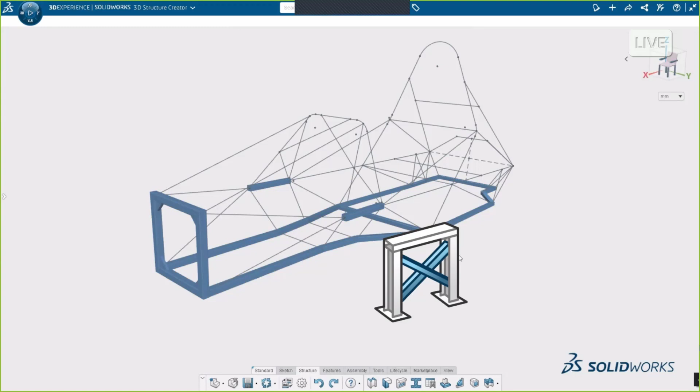I'll start my chassis design with a skeleton sketch. I can freely select sketch segments in the graphics area to use as a reference for creating structure members. I can quickly access the structure member command from the pop-up context menu. I just realized I thought I was being cute by putting that icon there, and it's totally overlapping all the graphics now. Instead of selecting the remaining members one by one, I can activate the selection helper.

The yellow lines show suggestions for additional selections. Manually selecting a few more references will improve the suggestions. A simple click of the button gives the go-ahead, and all the suggested sketch segments are selected. Notice he was brave enough to include all those rounds as it should be designed: uncut continuous steel tubing. I'll use the merge members command to create a single member for the main hoop.

What? Next, I'll add materials to my model. 3D Structure Creator includes hundreds of realistic materials to help you visualize an accurate representation of your final product. Options for materials include fabric, plastic, metal, paint, wood, and many more. I can change the ambience environment as well. The road ambience seems fitting for a race car.

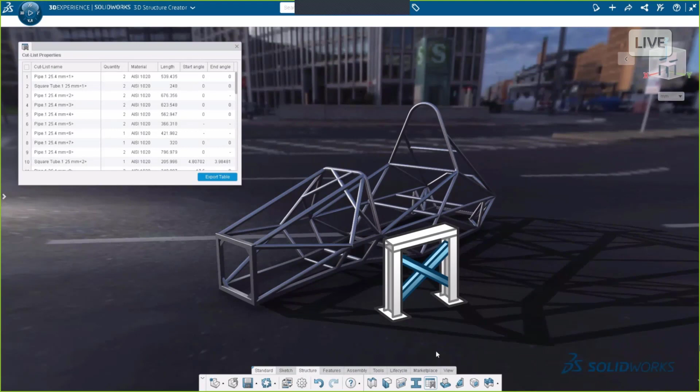Look at that. With the design complete, I can generate a cut list for manufacturing with the push of a button. The cut list displays member properties such as the profile, quantity, material, length, and cut angle at either end. The cut list is automatically updated based on any design changes to the model.